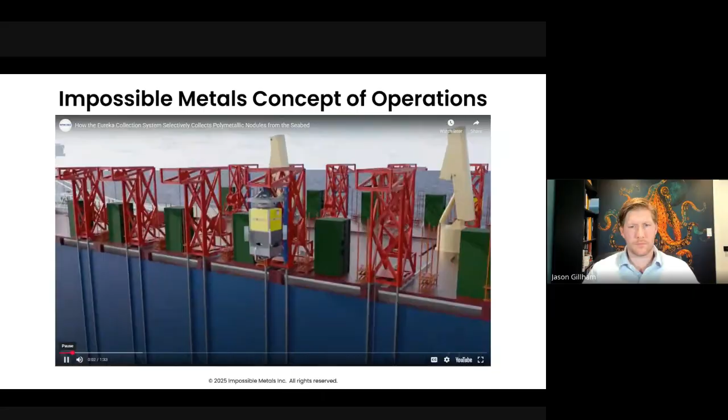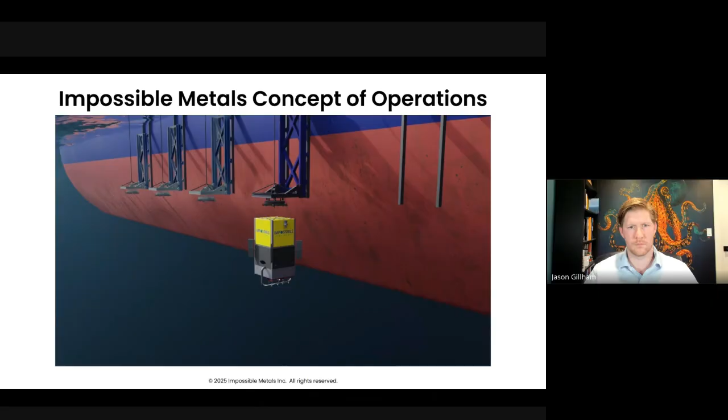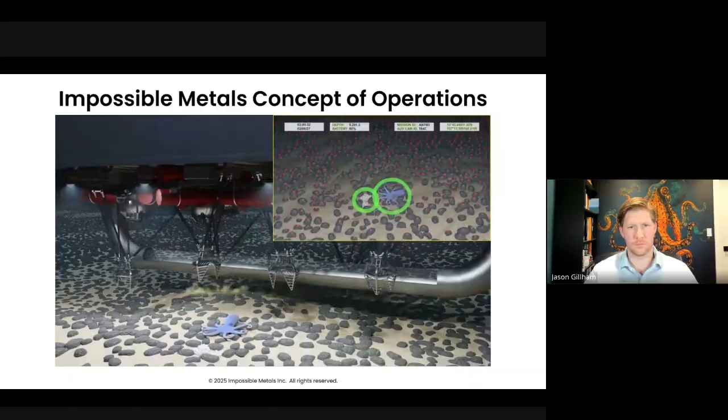At Impossible Metals, we have developed the Eureka Collection System. Underwater robots are launched from a ship to the ocean floor, where there are vast fields of rocks called polymetallic nodules that are rich in critical metals. Hovering over the ocean floor, the robot uses camera-based artificial intelligence to control its arms, selectively collecting nodules while minimizing sediment disturbance and avoiding all visible life. The collected nodules are stored on board. A large percentage of nodules remain untouched, preserving habitat and biodiversity.

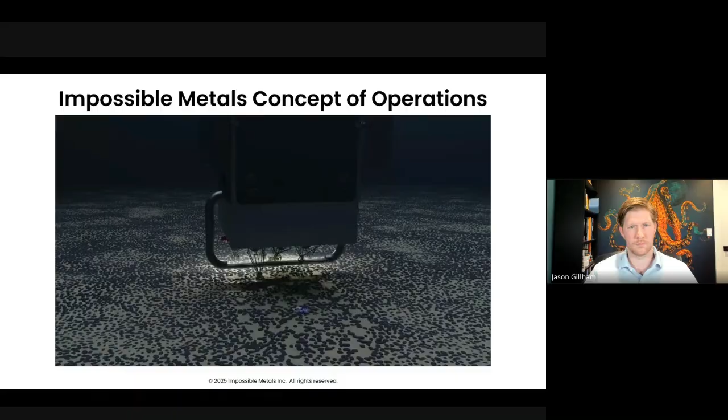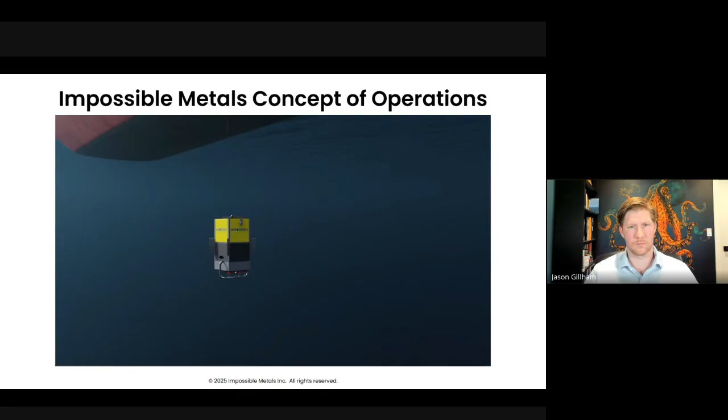Once the robot is full, it ascends to the surface ship. A smart hook autonomously connects to the robot below the wave-affected zone. A crane lifts it aboard using a rail system. The bottom payload door opens, and the nodules are offloaded onto a conveyor belt to transport the nodules to the storage compartments of the ship.

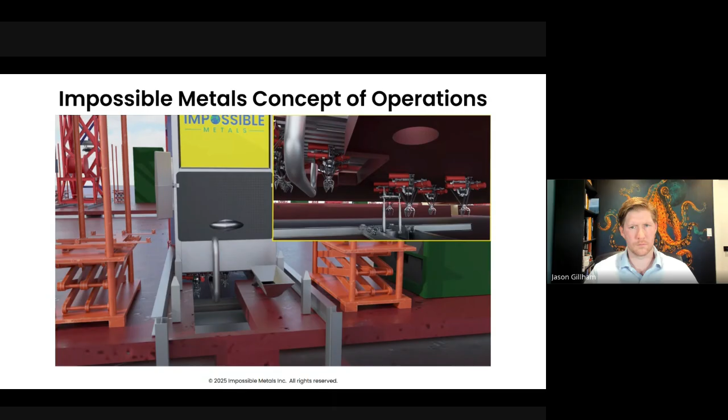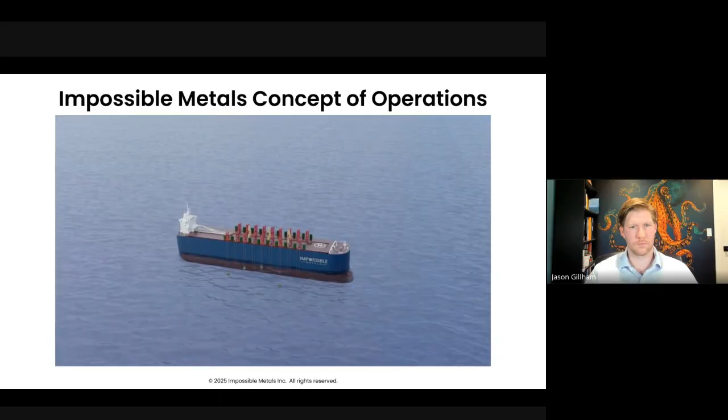The battery is swapped with a fully recharged pack. If required, the vehicle is moved to the maintenance station, where the arm assembly is autonomously swapped out and other maintenance is performed. The full cycle of collecting nodules repeats approximately every 4 hours. Ships travel between the mining area and the processing plant, with full ships departing and empty ships arriving. The swarm of robots remains at sea collecting. Our highly scalable fleet is designed to reach the high production levels required to meet market demand.

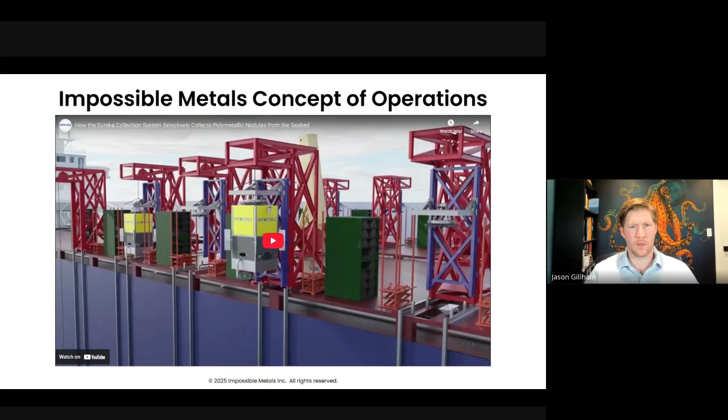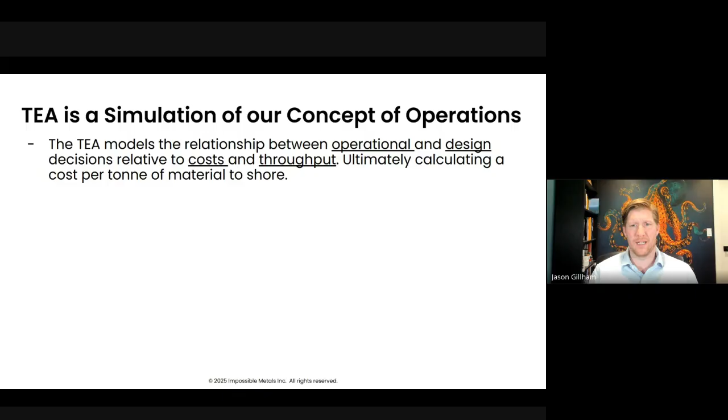So, as I mentioned, the TEA, the Techno-Economic Analysis, is really a simulation of that concept of operations, where we understand some of the operational decisions and design decisions that we make for the vehicle, and then relate those operational design decisions through to a cost and throughput result. Ultimately, from that cost and throughput, we are able to then calculate what is that cost per ton of material from the ocean floor to shore, how much is moving, and what does it cost.

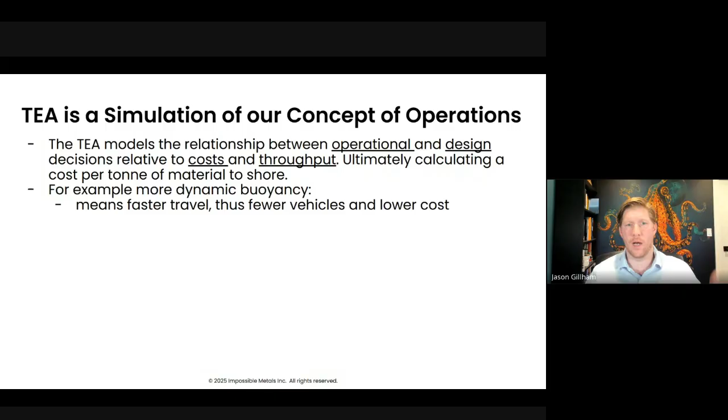So one example of the kind of engineering trade-off and simulation that's taking place in this model is the dynamic buoyancy engine. So when we have more dynamic buoyancy, for example, that means that we will travel faster up and down through the water. That means that we have fewer vehicles and lower cost. But correspondingly, the model also recognizes that by having more buoyancy capacity on the vehicle, that means bigger buoyancy tanks and higher cost, but it doesn't mean only bigger buoyancy tank costs.

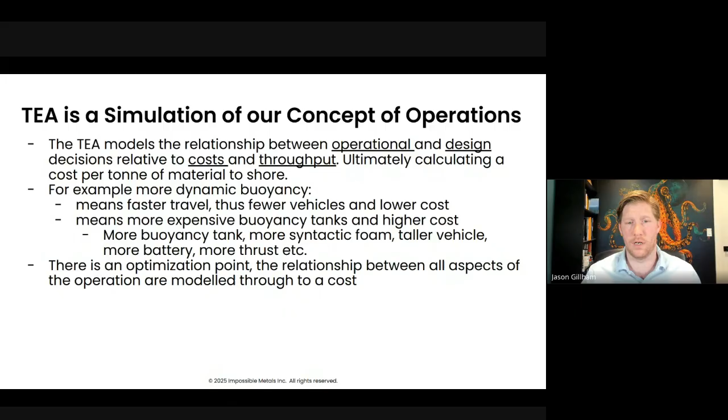It also understands that with more and bigger buoyancy tanks, that will need more foam in order to offset that weight. It also means that the vehicle can be taller, meaning more thrusters, more batteries, and all of that is simulated in order to really figure out what is that optimization point, in this case, for understanding how much buoyancy engine should the vehicle have, given all of these interrelationships between the engineering of the vehicle and then the cost of our operations.

Last on this slide, I wanted to share a bit of a quote that actually was when I was interviewing a co-op student. They shared it with me, and it really stuck with me. But it says, 'All models are wrong, but some are useful.' And I think that that's pretty appropriate for any time that you're looking at any sort of simulation, any sort of model. We know that it's going to be wrong. We know that it doesn't perfectly model the reality of what will ultimately transpire. But the important thing is to understand how we make decisions based off of this model, and what kinds of confidences can be had based off of what we are seeing.

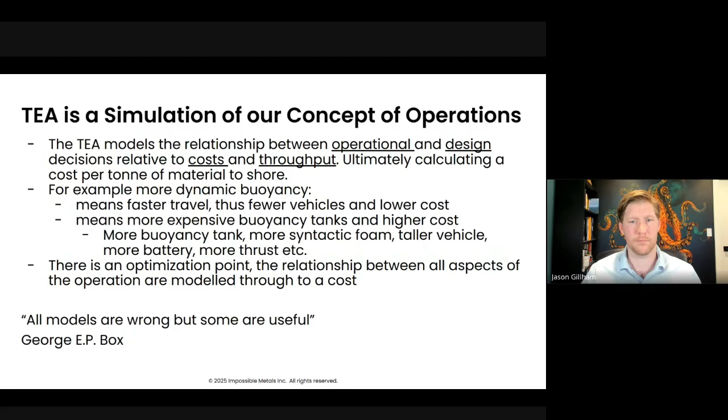So first is our parameters tabs, really broken into 3 areas: the site parameters, the technology parameters, and the market parameters. So for example, site parameters, as the title says, are about the site. Things like, how deep are we operating? How much current and flow can we expect at that site? And all that fits into the simulation.

Similarly, it also talks about nodule sizing, and that's one of the big things that we've really keyed in on with this version 7. It deals with some of the nodule size distributions and our technology's ability to really take advantage of that size distribution in order to have superior economics. We'll get into that in a bunch of detail through the presentation.

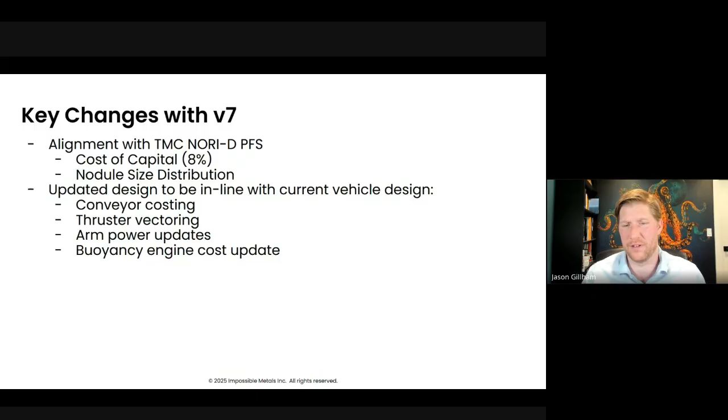And then there were some updates on the buoyancy engine costing. All of these are not particularly substantial in the scheme of things. With version 7, these have been updated, but aren't overly meaningful in terms of cost implications relative to version 6.

The other thing that I want to highlight that, again, isn't highly meaningful from a cost standpoint, but I think is highly meaningful from a confidence standpoint, is that really all of the components for the system are now based off of specific vendor quotes. So we are able to build the actual cost quoted by vendors that we have purchased equipment from, often for Eureka 2. That's now all built into the model, giving a lot of confidence.

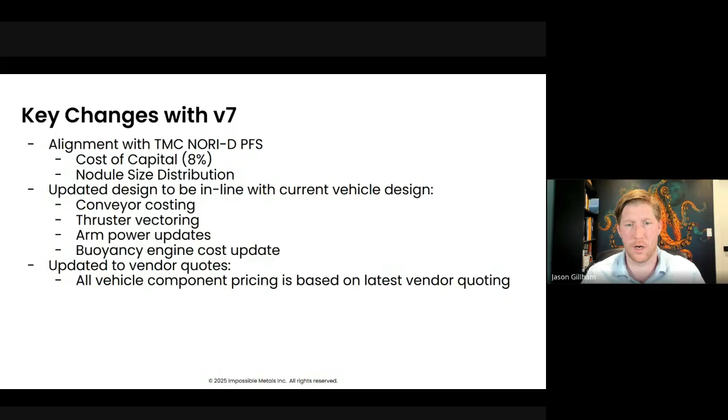We have not considered any volume pricing into any of those costings to date. I do suspect that we will be able to see some substantial cost savings in certain areas of the components for the vehicle, and so that will provide some further benefit down the road.

And then the second last piece is that we've removed some remnants of the project cash flows in the model. Around version 5 of the model, we had previous to that been using a single workbook that incorporated not only the techno-economics, but also aspects of the project cash flows and a P&L. In version 5, I believe it was, we pulled that out so that there was a separate piece. But in model versions 5 and 6, we had some remnants of that because we were using it for aspects of the optimization. That's now been pulled out, cleaning things up and making it more easily understood what we're doing there.

So previously where we were optimizing for a net present value, we're now optimizing specifically the cost per ton to shore. It worked out to the same in the past, but it's clearer what we're doing now.

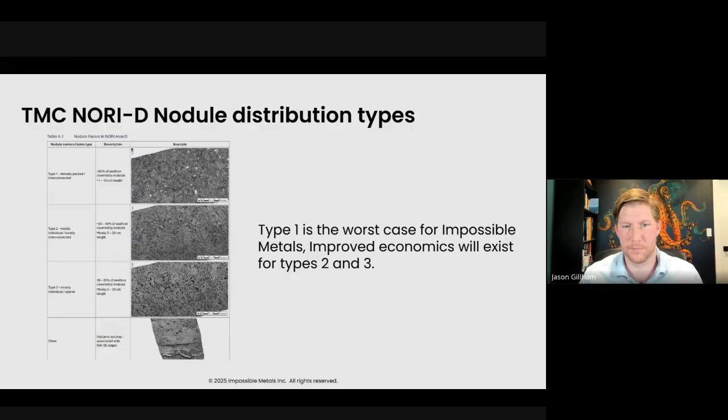Next, they provide data related to figure 7.44, showing all 486 box cores, colored by type: type 1 as black, mixed types 1, 2, 3 as red, and types 2, 3 shown as green. Ultimately, what that then allowed them to do is pull through to say, what is the cumulative probability of the nodules versus the major axis length? So it lets us understand the size distribution of the nodules in the NORI-D area.

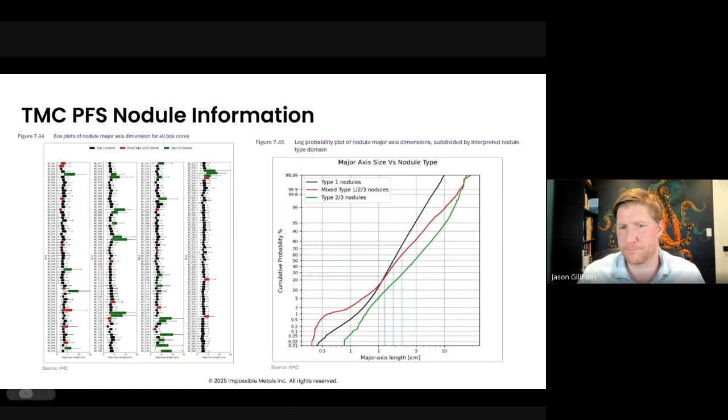And then lastly, because the nodules are slightly pancaked in the CCZ, a lot of their data allows for an understanding of the relationship between the major axis of measurement for the nodule relative to the minor axis, in order to come up with a relationship between the volume of the nodules and the major axis of that nodule.

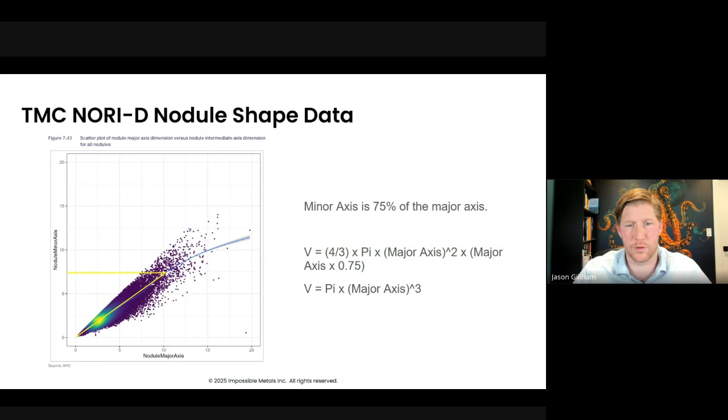So pulling all of that together allowed us to create this, which says, what is the cumulative percentage of nodules? So as you are sorting the nodules from largest to smallest and picking up a small percentage of nodules, what is the percentage of mass that gets picked up? As expected, as you get out to 100% of the nodules being picked up, you've picked up 100% of the mass. But the more interesting point is around here.

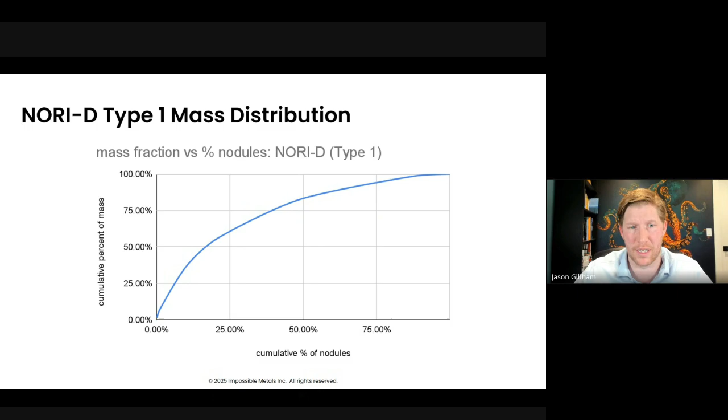So down here at about 5% of the nodules picked, we are at about 30 to 35% of the nodule mass having been collected. And this is what gives us that economic benefit of selecting the larger nodules, because the number of nodules picked takes about the same cost for us, but we're able to have much less cost for a higher percentage of mass that's been collected.

The really exciting piece for me about this is that it tells us we can go and collect 10% of the material and have the same economics as if we were collecting everything. Because we are collecting that material evenly, after years of further study having collected only 10% of the nodules, we can come back 10 years later to continue collecting in that area without any change in the economic benefit to us. By having that precautionary approach, that's what's particularly exciting for me with what this has shown.

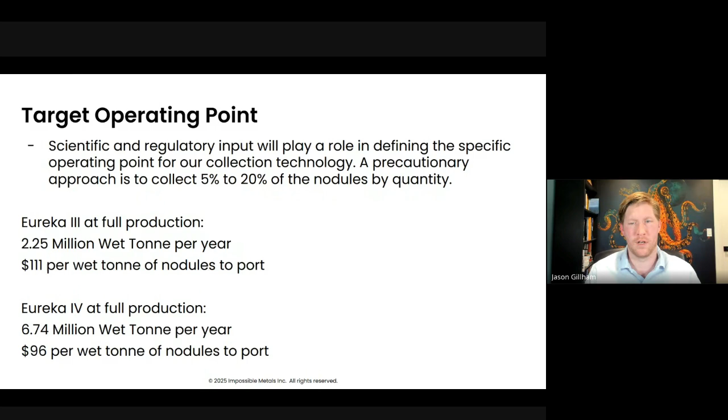So looking ahead to version 8 of the economic model: in addition to optimizing a specific vehicle for a specific site, which is how we're doing a lot of things right now, version 8 will allow us to take a vehicle that has been optimized for one site and then understand its economic performance at other sites.

There will be improved sensitivity analysis within version 8. We currently have some good understanding now about what is most important from an engineering standpoint in order to achieve superior economics, but version 8 will provide a lot of visibility and clarity as to what degree being wrong about one variable versus another will have an impact on our overall economics.

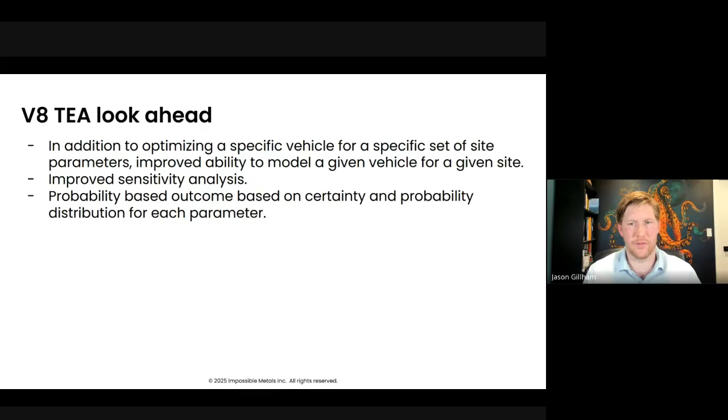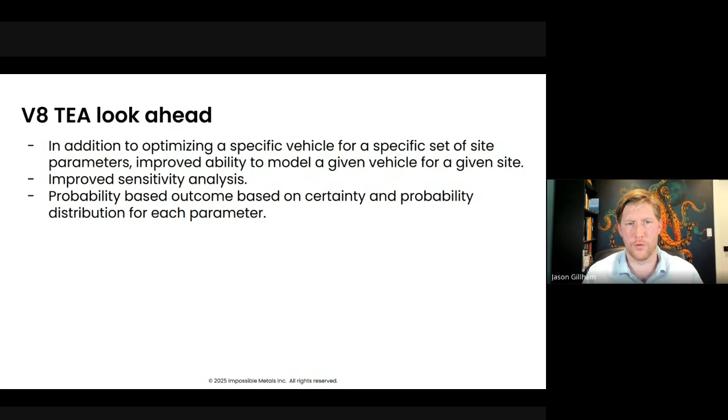With that sensitivity, and hand in hand with it, we'll be able to give some further probability-based outcomes and certainty of result. It will allow us to understand, as we change one of the parameters - say arm speed, for example - if we are right or exceeding what we're expecting by a little bit, how does that impact things? And then the same thing as we see ourselves not achieving those outcomes, how does that impact the economics?

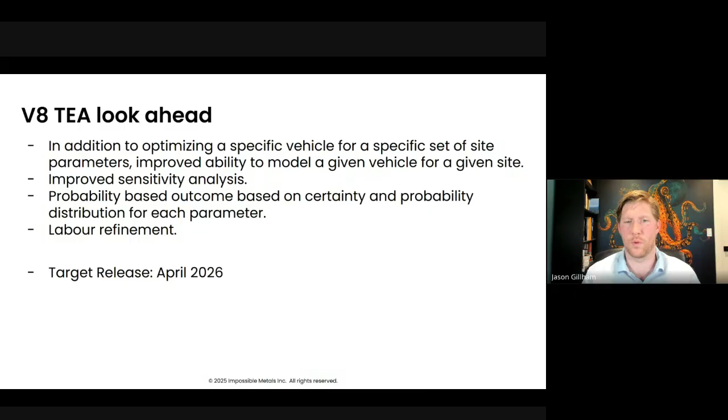And then I think last is the labor refinement. We haven't looked at some of the labor - build labor as well as operations labor - for a while, so labor refinement is one of the things that will take place as part of version 8. Our target release for that, we're looking at April of '26 for publishing version 8 of the TEA.

So the final takeaways: the model really is a simulation of our concept of operations. It takes that technical operations and relationships from a physics standpoint, combined with the associated costs, to understand how changing one parameter ultimately changes our cost per ton to shore. It's important to note that our cost per ton to shore incorporates not just OPEX but CAPEX as well - that's where we use the weighted average cost of capital of 8%, combined with the OPEX, to understand the complete cost for the system.

And then top grading, we've talked a bunch about that, where we're able to be selective about what it is that we're picking up. If we're selective to pick up the largest nodules, that gives us very strong superior economics, but we have very strong economics even while not top grading and collecting a uniform percentage of nodules. So with that, I'm definitely keen for any questions.

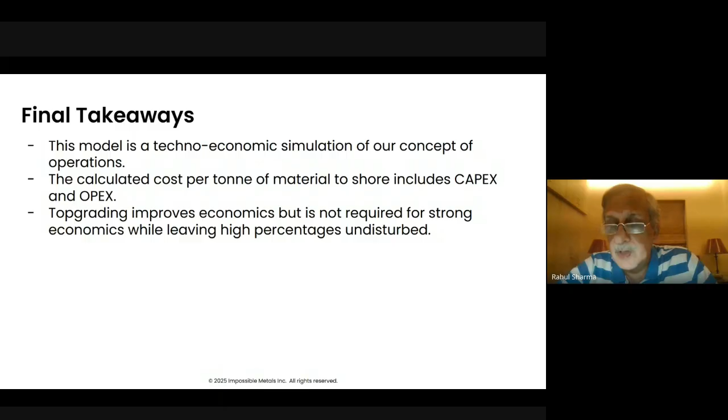One comment and one question. The comment is that I'm not sure if you have taken, when you talk about the size of nodules to be picked, whether you have taken the overall grade of the nodule, bulk nodule, because the size of the nodule can vary depending on the size of the nucleus also, which will actually not be something that is useful for you. So this is just a suggestion. Please keep this in mind, that while looking at the size of the nodules, do consider bulk chemistry of the nodule into your economic model.

My question is this. I can see that you have considered nodule to shore in the economic model. Are you planning to, or are you already considering the processing cost also in this?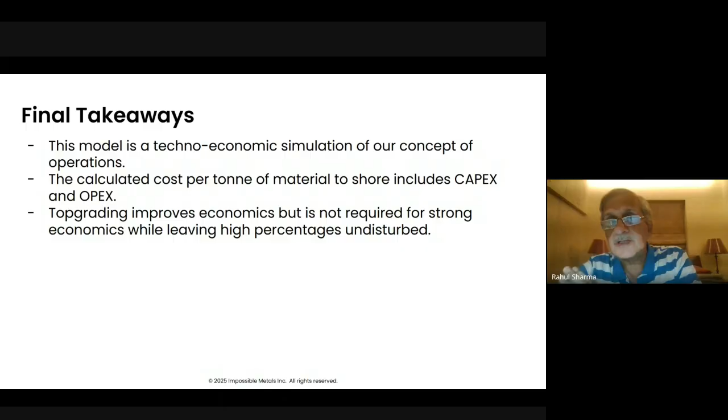The processing costs, so thank you for the first comment, really appreciate that. That is not something that is meaningfully incorporated right now, and something that I like the idea of incorporating into the future. So thank you.

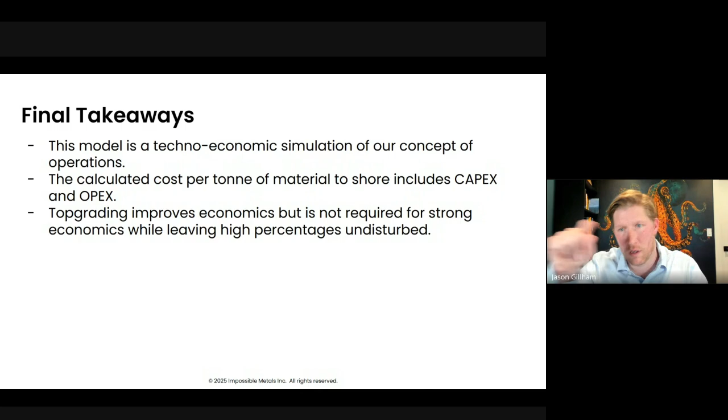On this model, the techno-economics looks specifically at the collection cost and the cost of ore to shore. The cost of processing and the processing strategy gets built into the project P&L modeling, where this feeds into. If you remember at the start of the presentation, we had the two blue boxes, one was scaling, the other was the top grading sensitivity. On the scaling side, that's where we're able to understand, as we scale and increase the number of vehicles, that information moves into the P&L as we scale, and the cost of processing is built into that as well. So that will be not what I presented, but part, as there really isn't meaningful change from V6 to V7, but is part of what is published as part of our overall economic model.